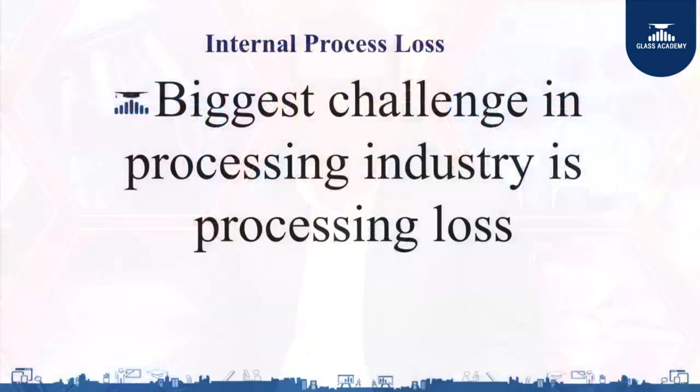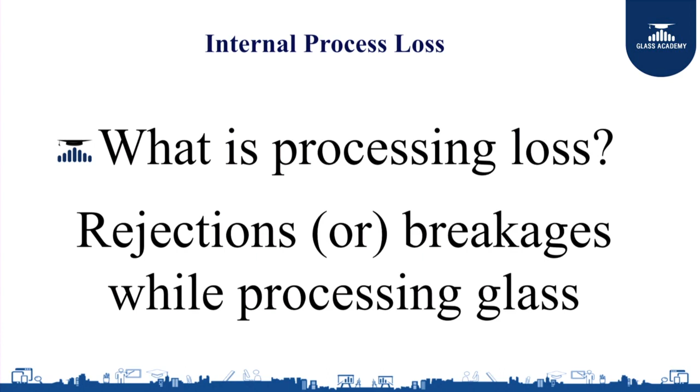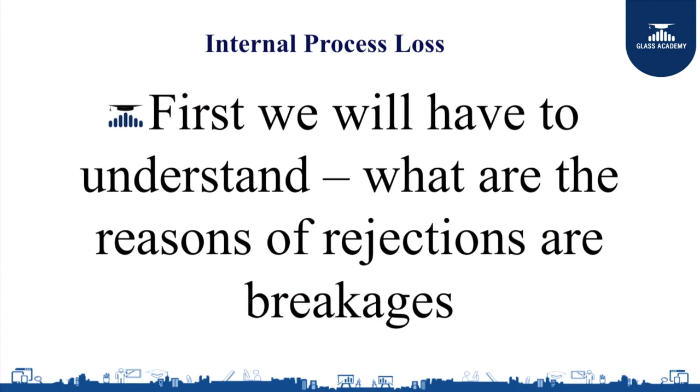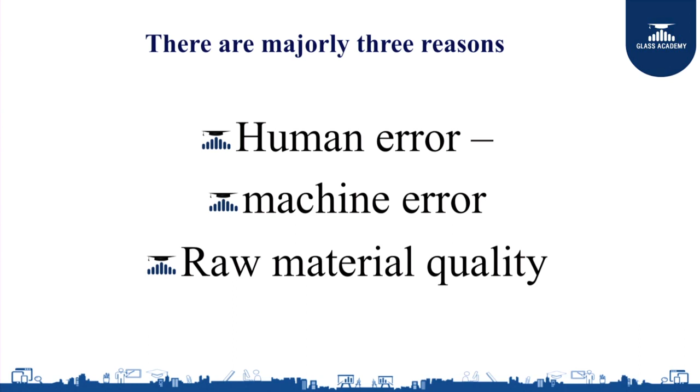Well friends, today I'll be discussing internal process loss. The biggest challenge in the processing industry is processing loss, which we need to understand. What is processing loss? Rejections or breakages while processing glass. How do you control or address this challenge? First, understand the reasons for rejections or breakages while processing the glass. There are majorly three reasons: one is human error, second is machine error, and third is raw material quality. Now friends, let's understand one by one.

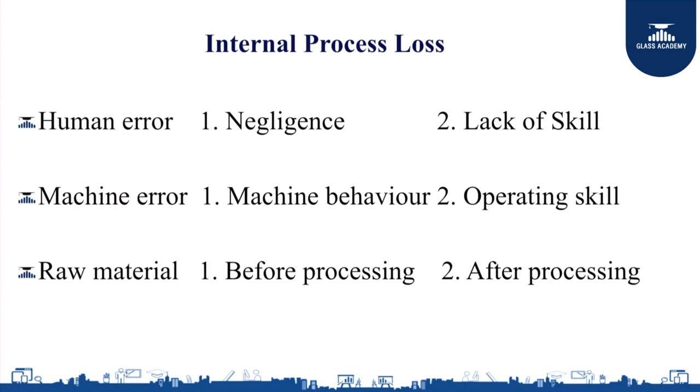Human error: one is negligence, and second is lack of skill. Machine error could be machine behavior or depend on operating skills. Raw material issues occur before processing the glass and after processing the glass.

Now let's discuss first human error - negligence and lack of skill. The major problem in the glass industry is rejection due to chip. Now why does it happen, and how do we avoid this?

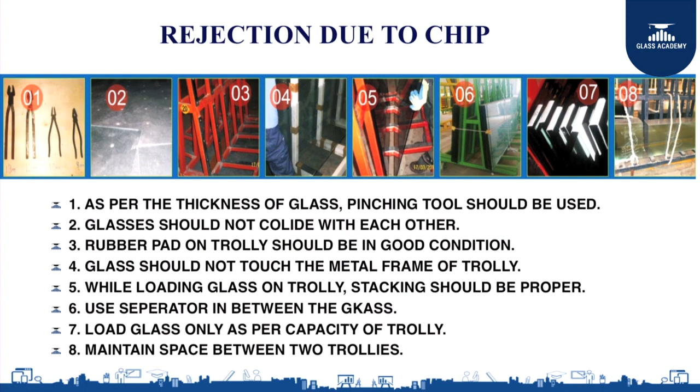Seven, load glass only as per the capacity of the trolley. This is a very important factor because there's a trolley and you are bound to put all the glasses available on it, forgetting that the strength of the trolley can take only one ton or one and a half tons. So you should be very careful, and glass should be loaded only as per the capacity of the trolley.

The second major issue is scratches. How do we avoid scratches? The very first point is that the cutting table should always be clean, neat and clean. You should clean air holes and there should not be any dust in the holes.

I'll show you - this is the table and there are certain holes. If you look over here, these are the holes. These holes will have certain dust inside, so you have to blow the dust out and make sure the table is clean so that glass doesn't attract scratches.

Felt condition - the condition of the felt should not be torn out or damaged. It should be totally clean and of good quality.

Fourth point is no metal contact with the glass. When you unload the glass, you should be very careful that it does not touch any iron particle or iron part on the table. You should be careful while unloading the glass on the trolley because, as I earlier said, rubbers on the trolley should be of good quality, and while unloading, the glass should not touch the iron part of the trolley.

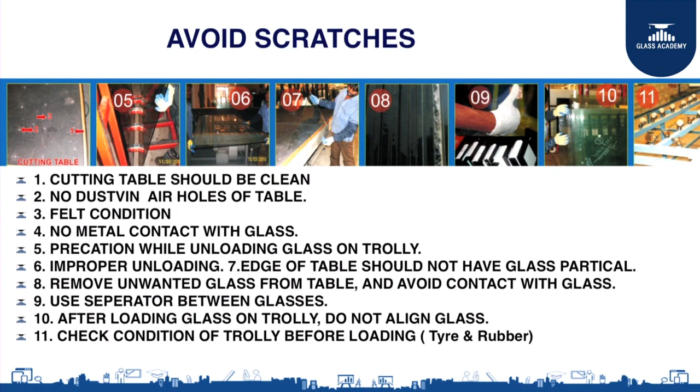Point ten: after loading glass on the trolley, do not align the glass. What happens is, just to align it, we push the glass - that should be avoided, because if you push the glass after putting it on the trolley, it will create scratches on the glass. Last but very important, check the condition of the trolley before loading.

Quality of trolley, what weight it can take, and quality of rubber.

Another aspect is finger marks. In coated glass, it is very important to avoid finger marks. You must always use proper gloves to handle the glass. Do not use the auto loader to pick the glass from the coating side.

Whenever you lift the glass, make sure the coating side is behind so that it will not form any marks. Do not use your finger to lift the glass from the coating side. Always lift the glass from below, from the clear glass side, and always keep the coating side up on the table.

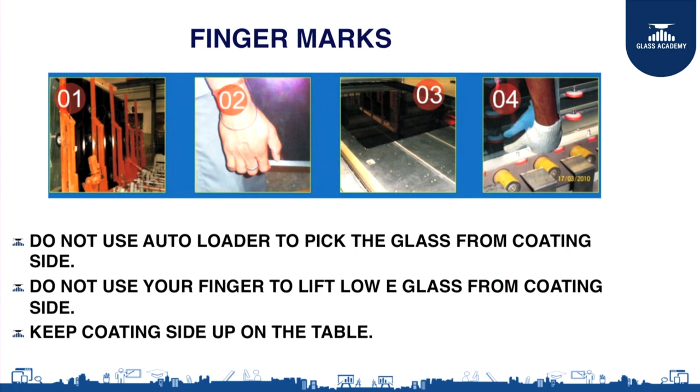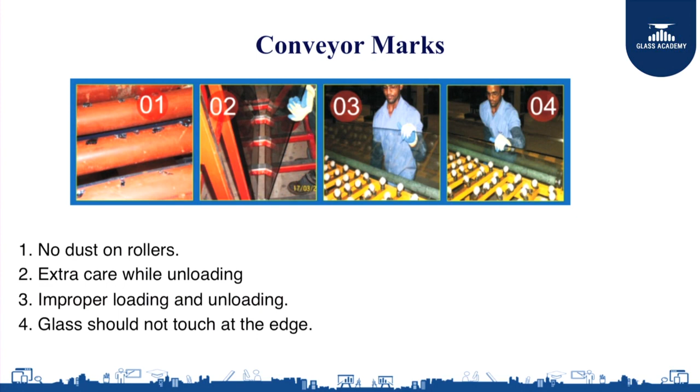Now conveyor marks: no dust should be on the rollers. Extra care while unloading, since improper loading and unloading can create marks. Glass should not touch at the edge. You have to be very, very careful.

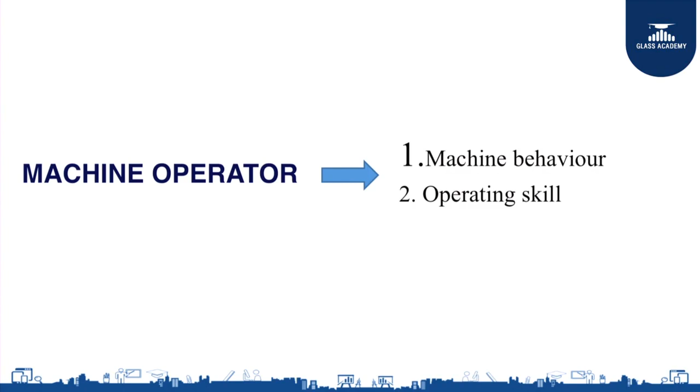Now coming to the machine operator. Again there are two reasons: either the machine is not behaving properly, or the operators are lacking the skill to operate it.

When you are cutting the glass, the coating surface should never be upside down. Excess oil impression on the glass surface should be avoided.

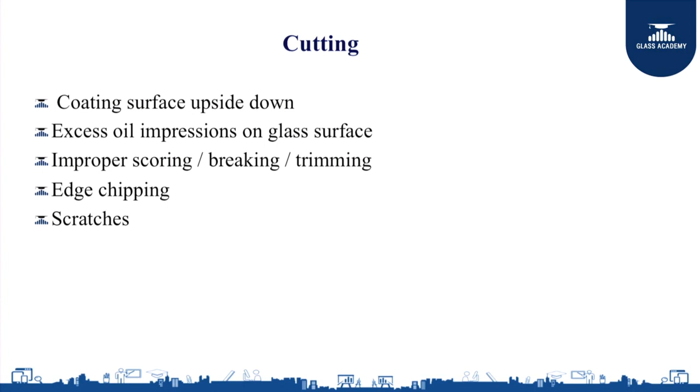While breaking and trimming the glass, scoring has to be taken care of and properly scored. While cutting the glass, edge chipping can form, so you have to be very careful, and of course scratches, as we discussed in earlier scratches slides.

In the cutting department, the first error could be a dimension error, and this could lead to customer dissatisfaction. Always refer to the optimization report versus the work order before the glass is cut.

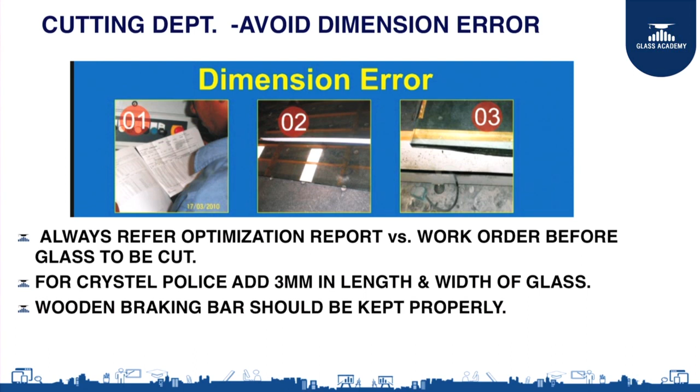For crystal polish, add 3 mm in length and width of the glass. The wooden breaking bar should be kept properly. These are the three reasons, and if we can address them, we can avoid dimension errors.

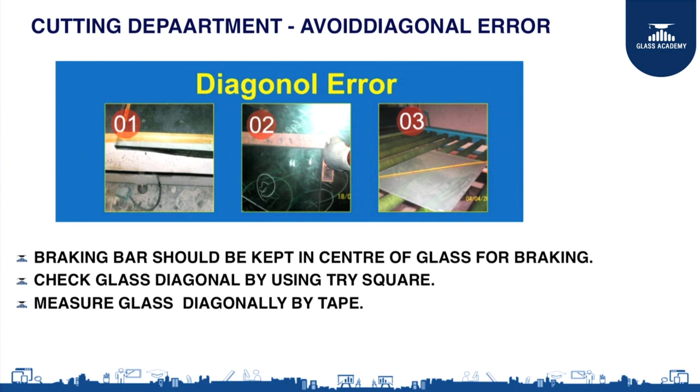Diagonal error: the breaking bar should be kept in the center of the glass while breaking it. Check the glass diagonal using a try square as explained in photo 2, and measure the glass diagonally by tape to make sure there is no diagonal error.

As just discussed, coating surface downside is a reason for coating surface identification error. Why does this happen? Because before cutting the glass, you don't identify which side has the coating. The corrective measure is that the coating side must always be on top unless specified.

Oil impression on the glass surface happens due to excess oil spillage. You have to be very careful while applying oil on the glass.

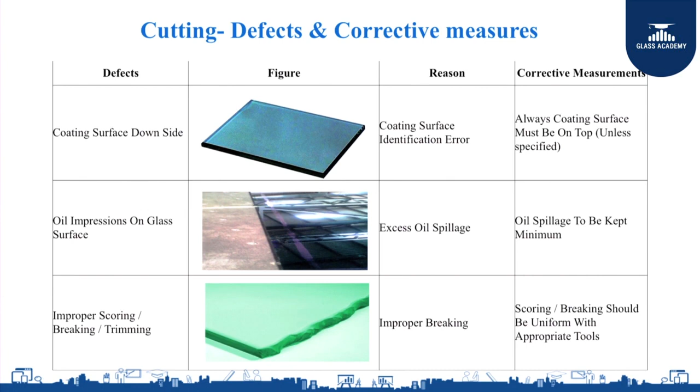Improper scoring, breaking, and trimming is again due to improper breaking. You have to be very careful. Scoring and breaking should be uniform with the appropriate tool, and this is how you can avoid major defects in the glass.

Edge chipping is again caused by improper breaking, handling, or stacking. The corrective action is to use a proper breaking tool and protect the glass surface.

Scratches are caused by glass debris on the cutting bed. This is the major reason for having scratches on the glass, so we must avoid any particles on the bed before cutting.

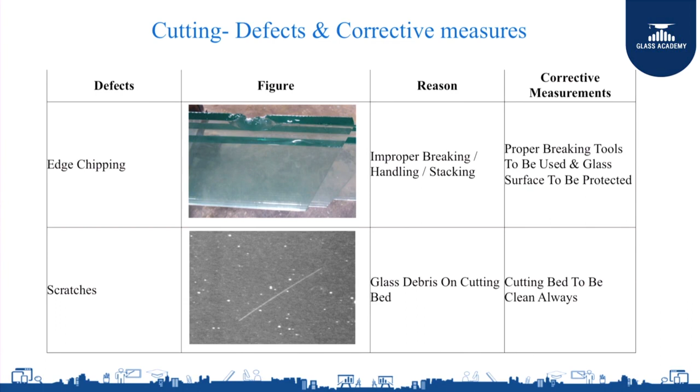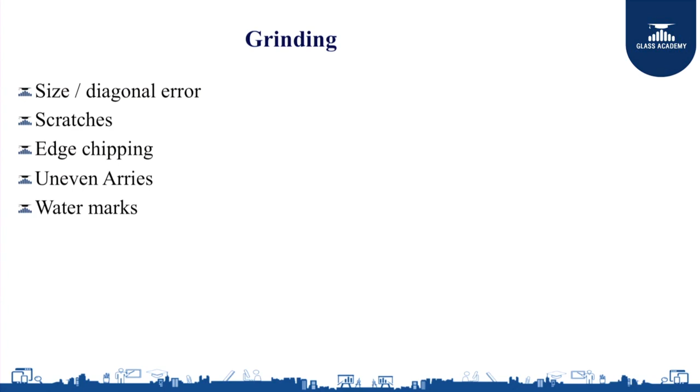Now let us discuss grinding. What kind of defects do we generally see? Size and diagonal errors, scratches, edge chipping, uneven arrises, and watermarks. These are the basic mistakes we find in grinding.

In the grinding area, how do we avoid defects and what corrective measures should we take? Diagonal error happens because of improper size feeding in the machine, so we have to make sure sizes fed into the machine are as per the work order.

Scratches are caused by improper loading, handling, and use of brushes while washing the glass. We need to check the grinding line, conveyor belt, trolley wheels, and washing brushes.

Poor edge grinding is again a machine setting problem. What we have to do is make sure to set the machine properly.

Watermarks are caused by poor water quality. To avoid watermarks, water parameters need to be maintained and checked properly before washing.

Edge chipping is due to improper parameter setting in the machine or handling. So we need proper setting and careful handling. This is how we can avoid mistakes in the grinding department.

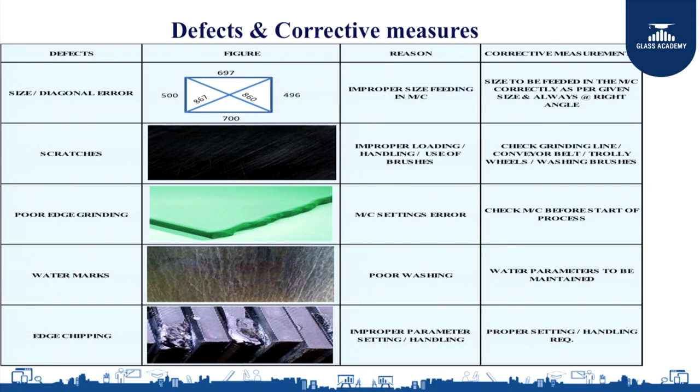In washing, again scratches and watermarks occur. As I mentioned, watermarks are due to poor washing or water quality. Water parameters have to be monitored, and it has to be between 6 to 8 pH.

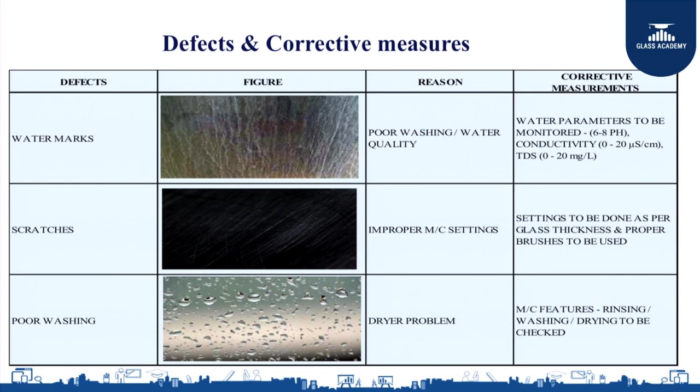Conductivity should be from 0 to 20 and TDS from 0 to 20. In the washing machine division, water has to be checked every day. pH, conductivity, and TDS are to be tested at regular intervals, and DM water to be used on Low-E glass.

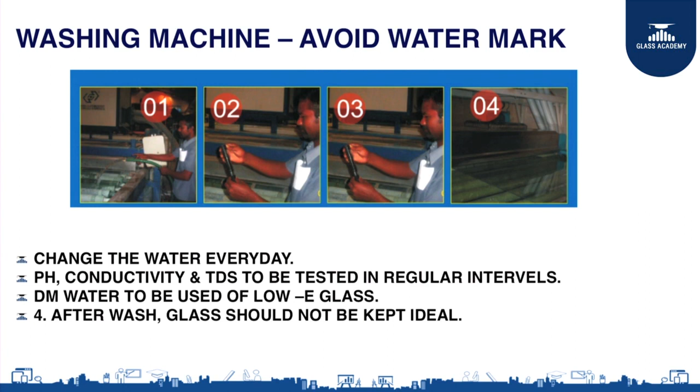After the wash, glass should not be kept idle. It has to go to the next department, because if kept idle, dust will form on the glass and spoil it, creating defects. Hence the quality of the glass will deteriorate.

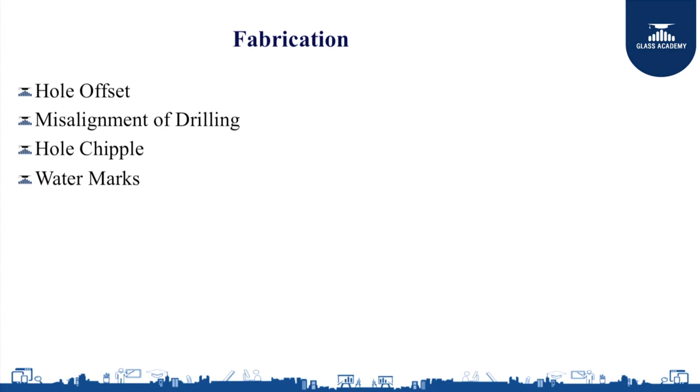Fabrication: the reasons here are hole offset, misalignment of drilling, hole chipping, and watermarks. Misalignment of the hole while drilling.

The reason is uneven pressure at the time of drilling. The corrective action is proper alignment of the drill bits and the table.

Hole chipping is caused by poor drill bits. You must check the quality of the drill bit before you drill the glass.

Hole crack is again caused by poor pressure application on the glass. Hole diameter, edge distance, and glass thickness all need to be checked carefully before drilling.

Watermark occurs from drilling done for a prolonged period of time. Water parameters in drilling need to be maintained.

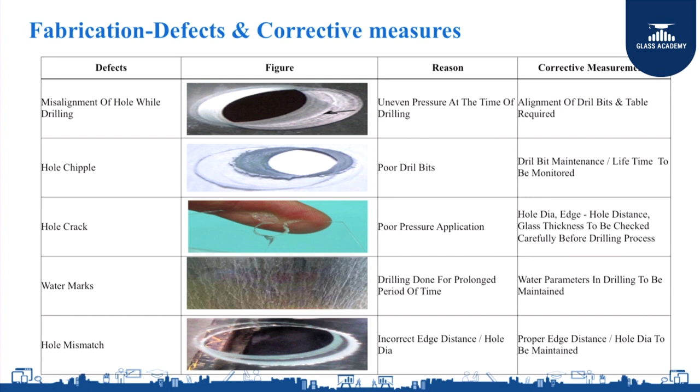Hole mismatch is due to incorrect edge distance or hole diameter. This needs skill. Proper edge distance and hole diameter need to be maintained, so you need a little training before you get into drilling holes.

The major lesson to learn for the drilling machine is to check the dimension of the glass before drilling, and use the correct drill bit for the holes.